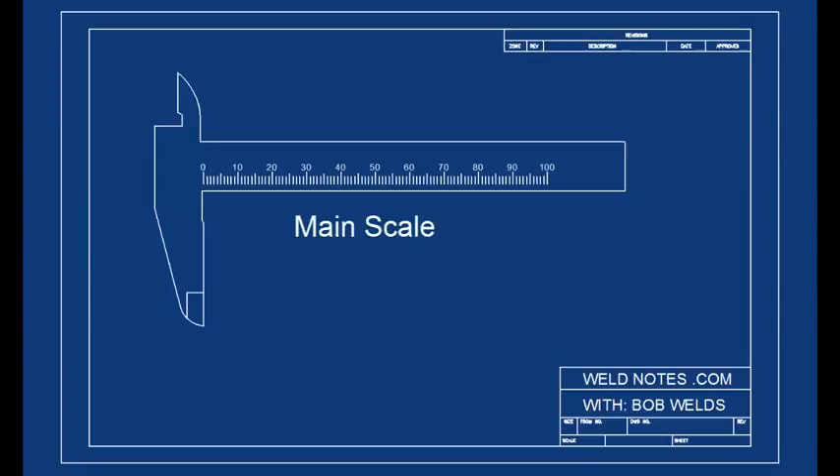There are a lot of different types of calipers out there, but today we're going to be looking at a metric dial caliper that can read to the nearest 1/100th of a millimeter. We look on the caliper itself to see what each mark on the dial represents. See, this one says that each mark on the dial represents 1/100th of a millimeter. That is 0.01 millimeters. The dial calipers have two scales, a main scale and a dial scale.

Let's look at the main scale first. I don't think it'll give us much trouble at all. The marks on this scale are just millimeters. Every 10 millimeters, there's a label, sort of like a little ruler. You read the main scale here, along the edge of the sliding part of the calipers. This edge is called the reference edge.

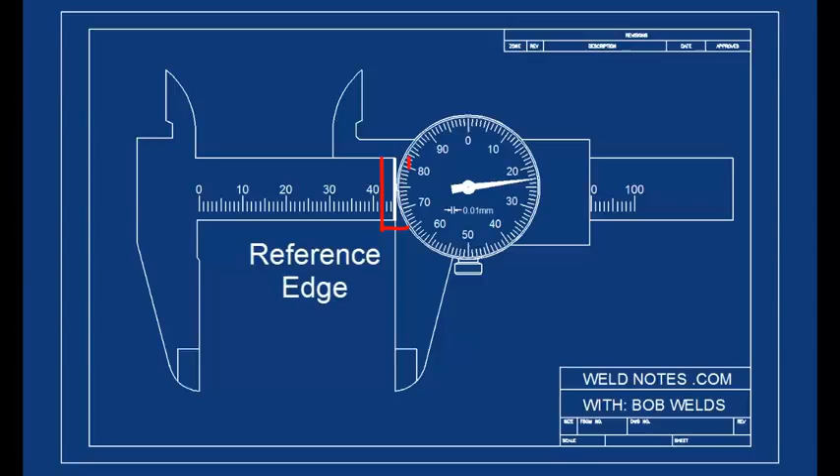I'm going to take the dial off this caliper and let you look at the main scale by itself. First, I'll set the calipers to read a little more than 15 millimeters, just to let you see how it works. You see, you can just count up to see the number of whole millimeters for the measurement, like this. 10, 11, 12, 13, 14, and 15. The reading is 15 millimeters.

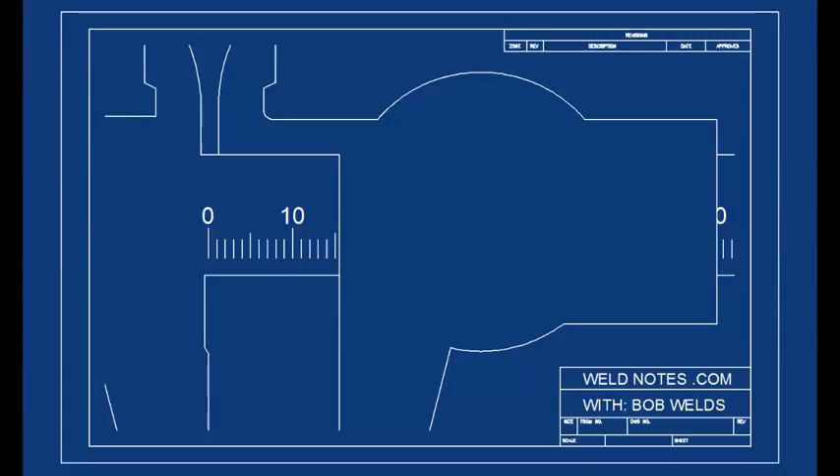Now, I'll put the dial back on and let you read that. With this caliper, the dial tells you the two numbers that follow the decimal point. Keep in mind that it's always two digits, no more, no less. In this case, you can see that the reading is 0.24. So the overall reading on this caliper is 15.24.

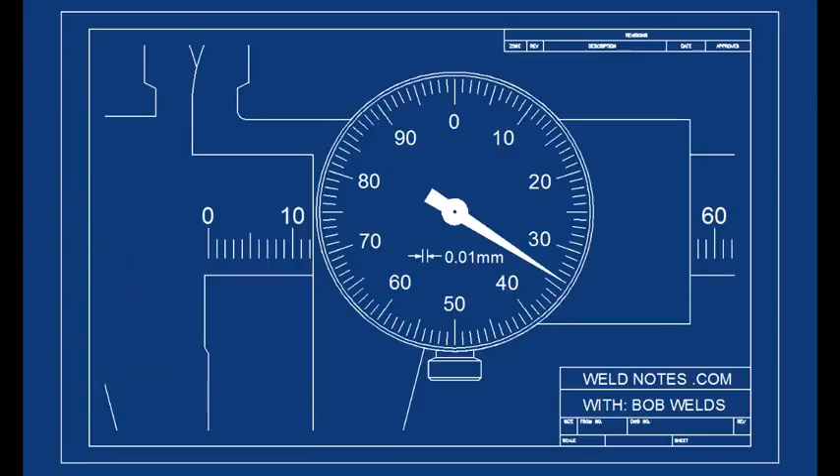Okay, it's time for you to try one. I'll set the caliper to a reading and let you try to figure out what that reading is. Pause the video when you see Sparky's pause. That way you can take as much time as you like. Okay, here's the reading. Pause the video and write down your answer. Did you say 12.34 millimeters? Great! Let's try another one.

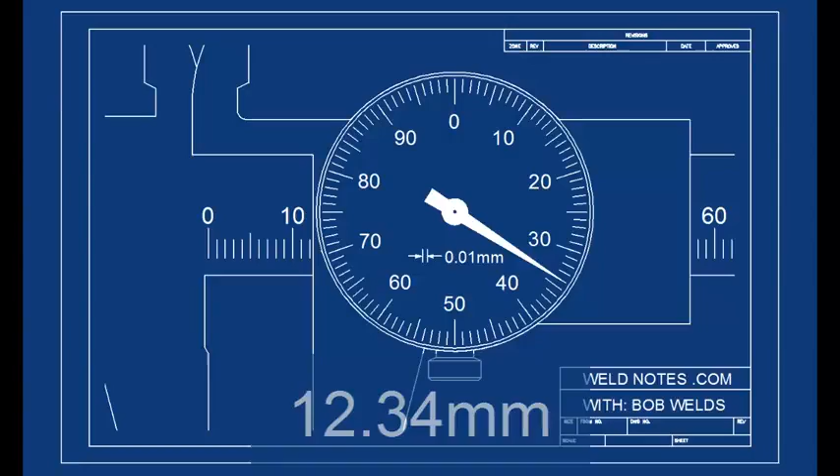This one's going to be harder, but I think you can do it. Pause the video to be sure you have enough time to think about it. All right, the answer is 10.07 millimeters. And this one reminds me that there's one last thing we need to cover. Did you notice how hard it was to see the 10 millimeter mark? Sometimes you may see just part of a mark showing. How do you know whether or not a mark is showing enough to be counted?

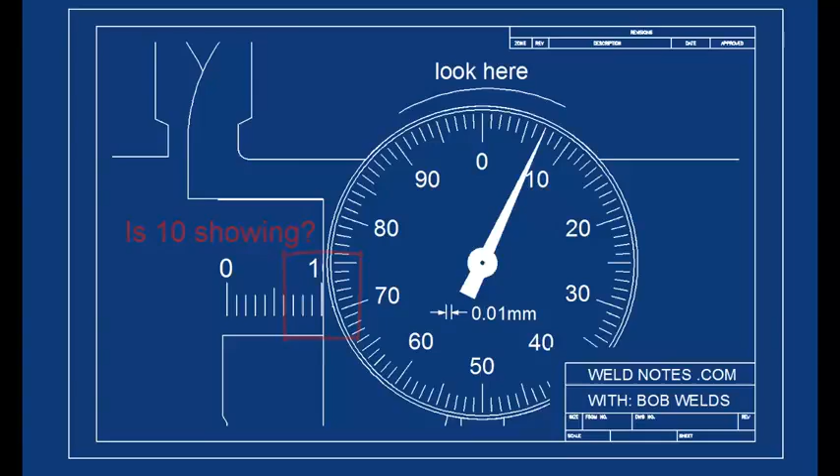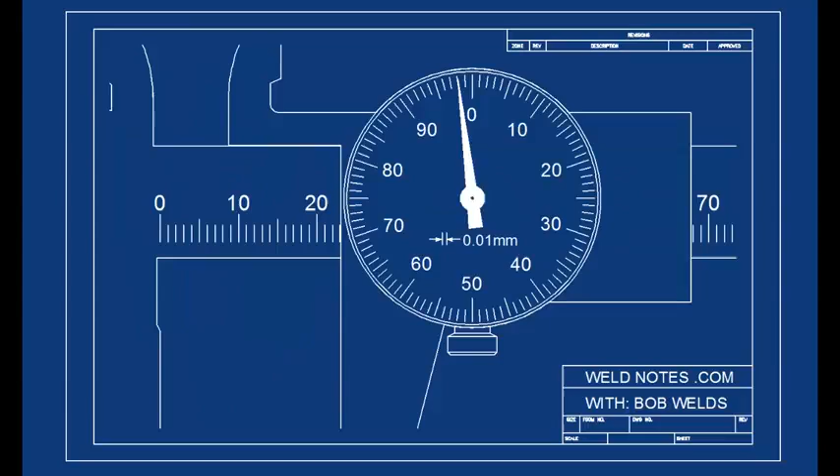Now here's the answer. To know whether or not a mark on the main scale is showing, look at the dial. If a mark is only partially showing and the dial is on a small number, then you count the mark. It's a new mark. If the dial shows a large number, like 0.96, 97, 98, or 99, then you don't count the partial mark. That mark doesn't count until the dial passes the 0 mark. Then you count it. Here's another example to show you what I mean. Pause the video and have a look.

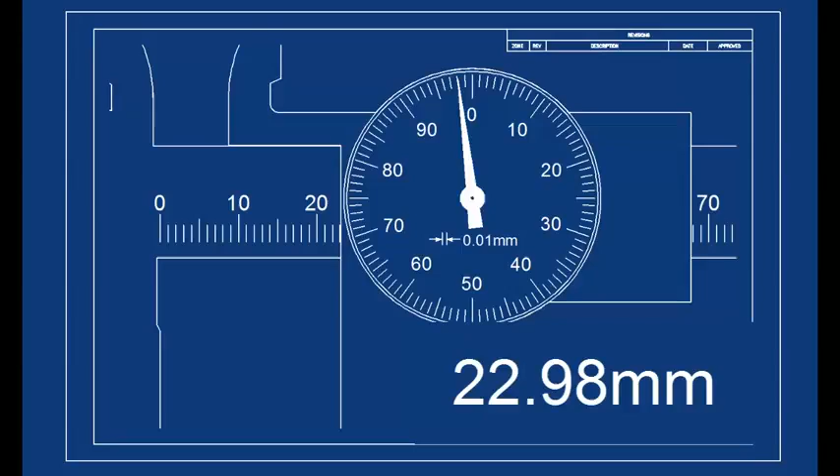The answer is 22.98 millimeters. See how the 23 millimeter mark is partially showing? But you don't count it because the dial has not passed 0 yet. Okay, this is the last one. If you get it, you're ready to use this beloved instrument. Pause the video and see how you do.

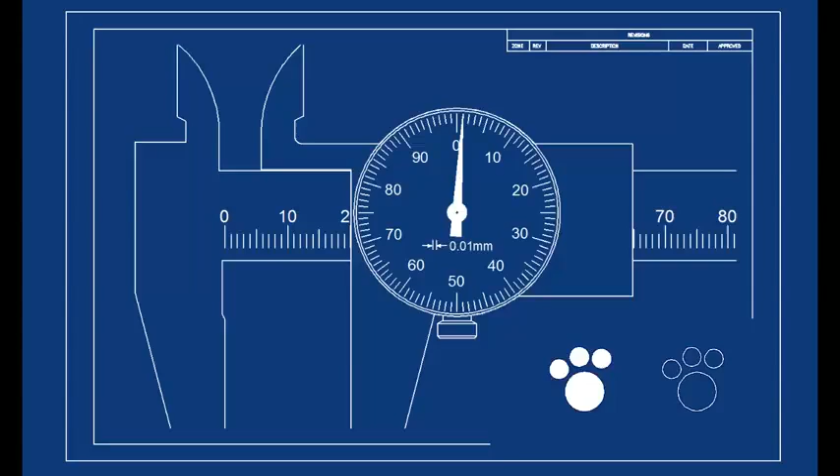The answer is 20.01 millimeters. Now, some people make the mistake of saying 20.1 millimeters, but that's not right. Be sure you remember that you're always reading 2 decimal places from the dial, and that might help keep you from making that mistake. Well, that's about all the time we have for now.

I hope you feel better about reading metric dial calipers.